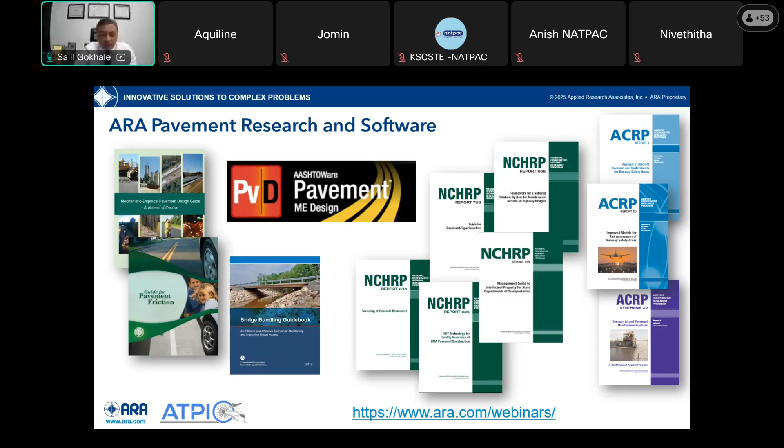So my topic today is to talk about pavement engineering. I'm a pavement engineer by trade, and I want to talk about where the state of affairs is related to pavement engineering and management here in the US and several other countries.

So what are pavements? Pavements are the largest investment in infrastructure. In any country, any agency, you have highways, expressways, city streets, roads, airports. All of these form part of the critical infrastructure, and this is the single asset that influences economic growth. If you can get people and goods from one place to another in a good amount of time without delays, you'll have good economic growth.

And pavements are complex, and they're built in a complex environment. You have all kinds of loading, weather, materials, etc.

Pavements are usually ignored by a lot of agency owners because pavements don't fail catastrophically. They're not like a bridge where suddenly one day it breaks and you have a catastrophic failure. Pavements deteriorate gradually, and even if a pavement has failed, you can usually still go over it. So most agencies still treat the problems seen on the surface, and they don't treat the underlying cause of the failures. This is not unique to any country, it's all over the world. Usually the treatment is reactive - you treat something only after failure has occurred and not proactively beforehand.

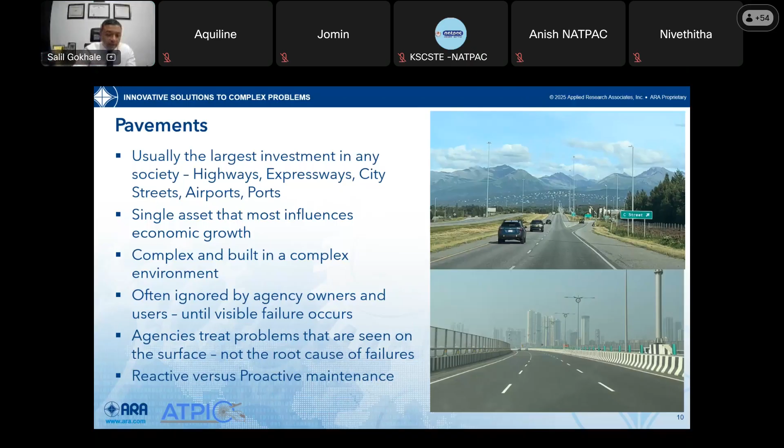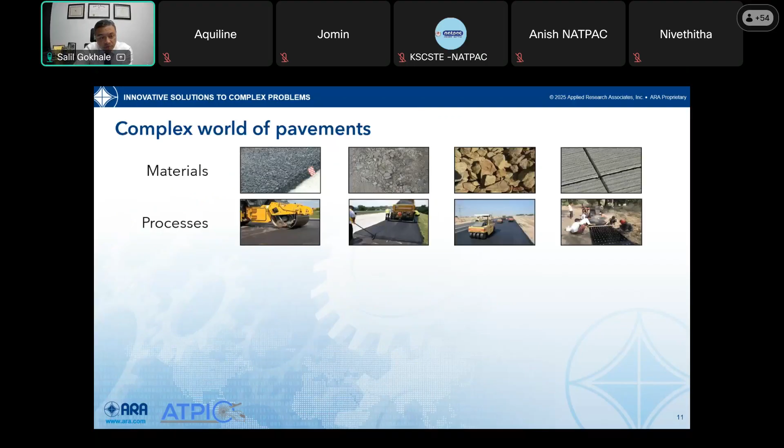So why are pavements complex? We have a lot of different materials - go from the southern tip of India to the northern tip, you have a lot of different types of materials. There are different processes in how these materials are produced, different construction techniques, different quality control measures. We have a lot of different loading scenarios - overloading, underloading, different tire types, pressures, and a lot of different environmental and weather conditions, ranging from very cold to very hot, and of course in India, we have the monsoon. So the interaction of all these different variables makes pavements a very complex phenomenon to analyze.

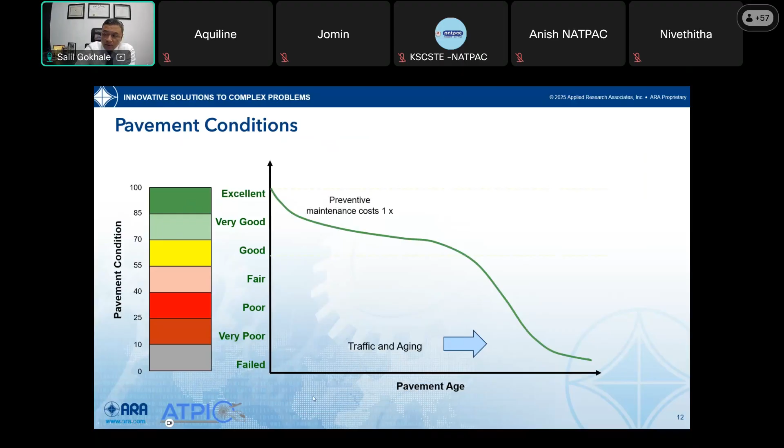Why should we be concerned? Because to treat a good pavement by doing preventive maintenance, let's say the cost is 1x. If you let the pavement deteriorate to where it goes into this good to fair, maybe poor category, now you're going to do some milling and replacing or paving, and the costs have turned 4 to 6 times that amount. And if you let the pavement fail and you have to reconstruct it, the costs are 12 to 18 times. So it's imperative that we optimize where we are treating pavement conditions, and how we optimize the limited budgets that most public works agencies have.

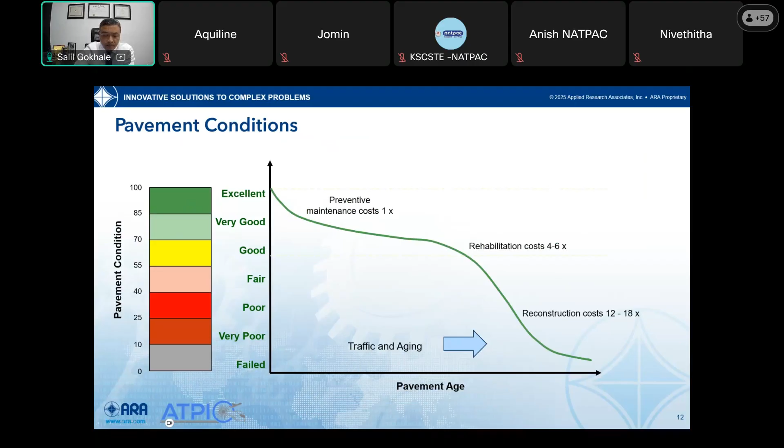When it comes to pavement performance, we define pavement performance in 2 broad categories: structural and functional. Structural is the health, the ability of the pavement to withstand loading without developing appreciable distress. And then functional is your riding quality.

How does the pavement ride? When you drive a car, or ride a bicycle or one of your 2-wheelers, are you getting a smooth ride? Is it a safe ride? Is the road having enough friction? These are functional measures. But both performance measures are interrelated, because if a road is rough, it generates a very high dynamic load, which leads to structural distress. And then the riding quality, if impacted by distresses, causes more problems.

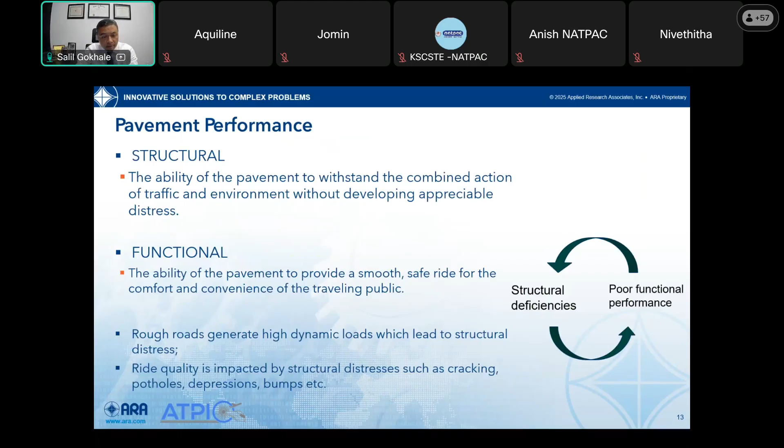So this is a cyclic phenomenon. Both these types are highly interrelated. So why would any agency collect information about pavement conditions? I mean, why do we want to know what the condition of our pavement is? Again, I'm calling pavements a broad term for any road, highway, airport, city street, etc. The generic term is pavement. So most public works agencies need to manage their network.

So let's say for the city of Cochin, maybe it has 1,000 kilometers worth of roads. The Public Works Department or the municipality of Cochin needs to know, okay, we have this network, what condition it is in, which roads to fix, when and where. And so to...

check the conditions, we need an objective methodology, and not just something subjective where you send someone out and he says, yeah, I think the road is okay, I think the road is bad, no, maybe it is good. No, we need an objective methodology to measure these conditions.

Then these conditions are used to forecast maintenance, repair, and reconstruction requirements. And most importantly, agencies need to find out what budget is needed. How much budget do we need per year to actually keep the roads in a decent condition, how to improve conditions, and what to do about catastrophic failures when you have really bad washouts or anything like that.

So here in the US, all the state departments of transportation are required to collect data on the entire network, and they're required to submit reports to Federal Highways, FHWA. Airports, of course, are a completely different animal. A lot of safety-related issues with bad pavements underneath aircraft. So airports across the world are required to submit reports. Here in the U.S., they submit reports to the Federal Aviation Administration.

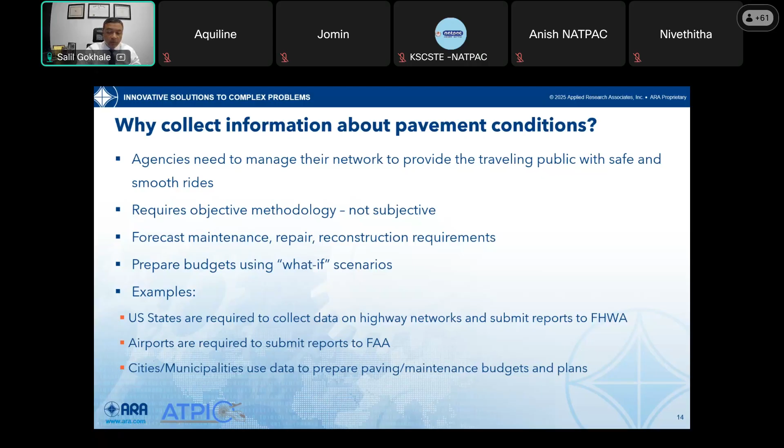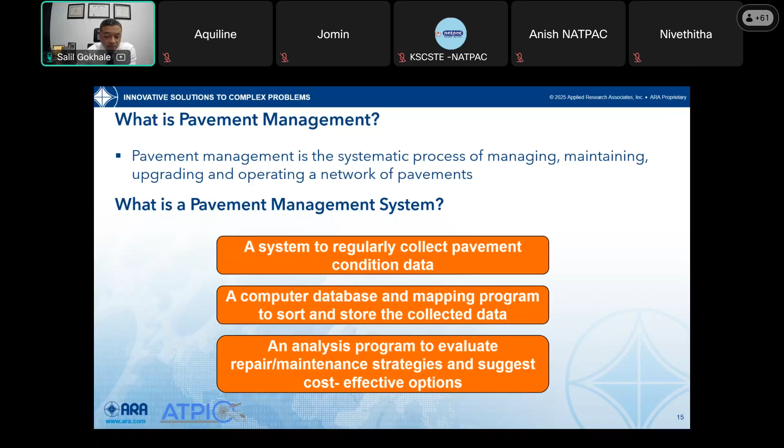So very briefly, what is pavement management? How do these agencies manage their pavements? Pavement management is the systematic process of managing, maintaining, and upgrading a network of pavements. And typically, they will use something called a pavement management system, which is a system to regularly collect pavement condition data. It's a computer database and a mapping program that stores all the records in one place. And then there are analysis tools to evaluate different strategies and suggest cost-effective options for that agency.

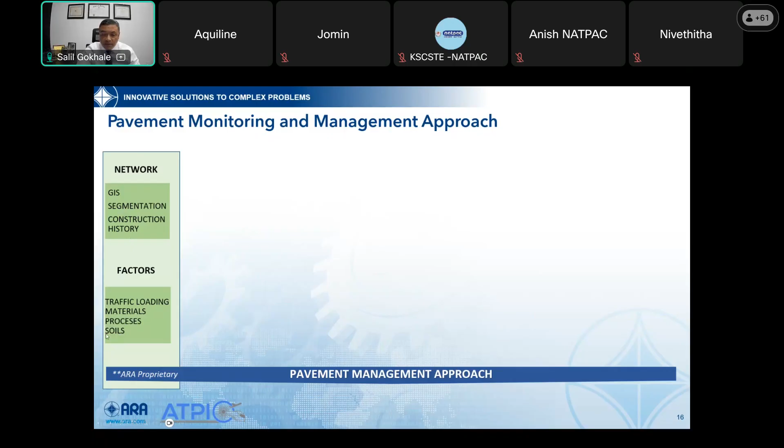So when we look at this holistically from a big picture perspective, how does this pavement management methodology work? We start by having a network of roads. We have geographic information systems, or GIS. We have a map of all the roads in an agency. We have segmentation, construction history, materials, and other factors like traffic, amount of traffic, different materials, soil conditions, etc. Then once that network is defined, we collect pavement conditions.

I'm going to talk more about how we collect structural data, surface distresses. IRI is a term you will hear quite frequently in this presentation. It's the International Roughness Index, which is a measure of how bumpy or how smooth a road is. Rutting, friction, and then it's supplemented by geotechnical testing, coring, lab testing, etc. And all of these inputs combined give us our functional and structural performance for every single roadway.

What do we do next? Then we have to do some analysis, right? We have to take all of these conditions, do some evaluation, make some determination about performance, find out the residual life. If the residual life is bad, or if it's expired, then we do some design. Most agencies are now turning to mechanistic empirical pavement design methods to find cost-benefit solutions and optimize their budgets.

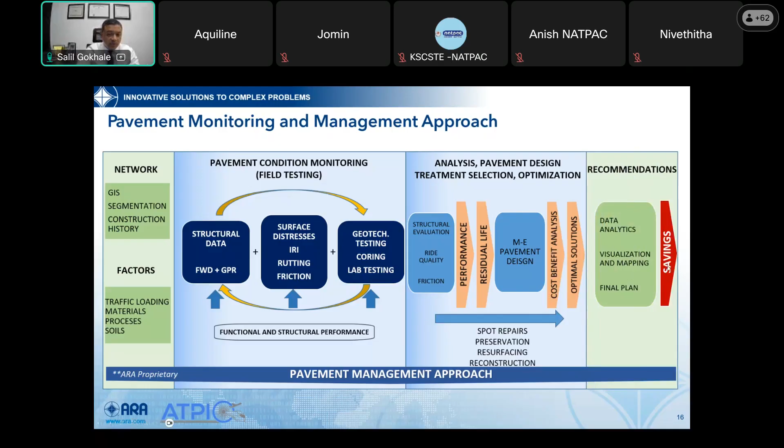And then the work plan at the end and recommendations is that most agencies will say, okay, we have this network, we have done all the collection and analysis. Here's our plan for the next 2 years, 5 years, 10 years, etc., and here's the budget requirements for it. End result is, we want to try and do savings at the end of the day. We're trying to save the taxpayer money by keeping the road network in good condition.

And as you all are researchers, where does research fit into this? Well, we are doing research on materials, or we're doing research on pavement structures, or other construction techniques. The use or the outcome of that research needs to be fed back into the cycle so that whatever good things you're finding out from research can be fed back into this loop, and you're getting the benefit from this research. So this is where accelerated pavement testing comes in, and I'll talk about that a little later on.

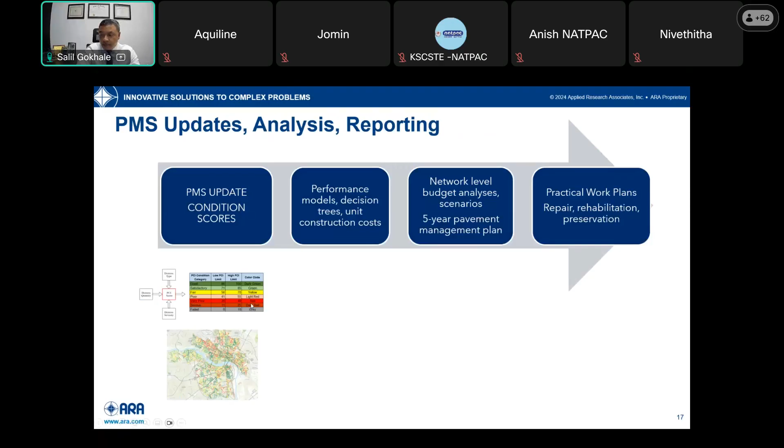Just to round up the pavement management cycle: we have a system, we update it with different condition scores, we do some modeling and pavement performance decision trees, find out what kind of treatment toolboxes we have, then we do some budgeting analysis to find out condition deterioration as well as amount of money required.

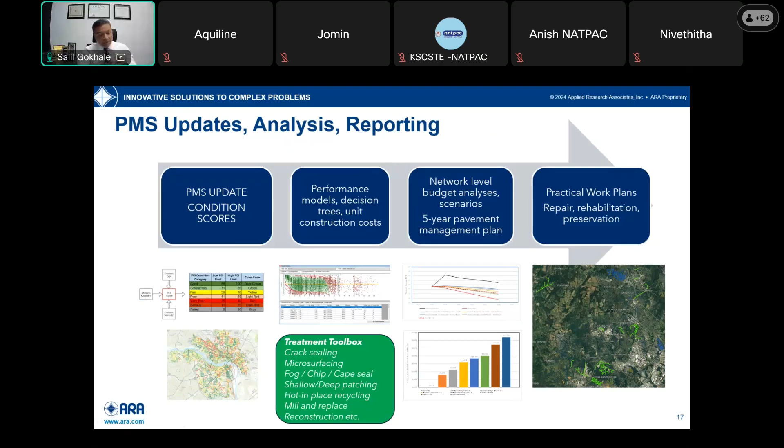And at the end of the day, we want a practical plan that can be put in place, and then you follow that plan. This is just like your asset management that you do at home, where you invest some money into a particular mutual fund or shares, and then you're following a strategy to make sure that your asset actually grows and develops.

Commercially available software: there's a bunch of commercial software out there, ranging from Paver, which is a Corps of Engineers product and the most economic. Then you have all these other online-based tools like StreetSaver, Cartegraph, Agile Assets. World Bank has the HDM4 software. I know a lot of agencies in India are using RAMS, and then others from other vendors. But the main idea is that you implement, update the conditions, analyze, maintain the system, and then repeat the process. There has to be a repetition and a cycle to do this.

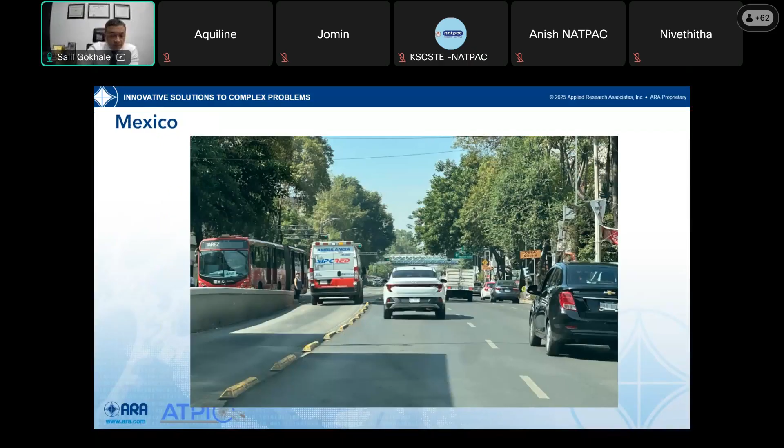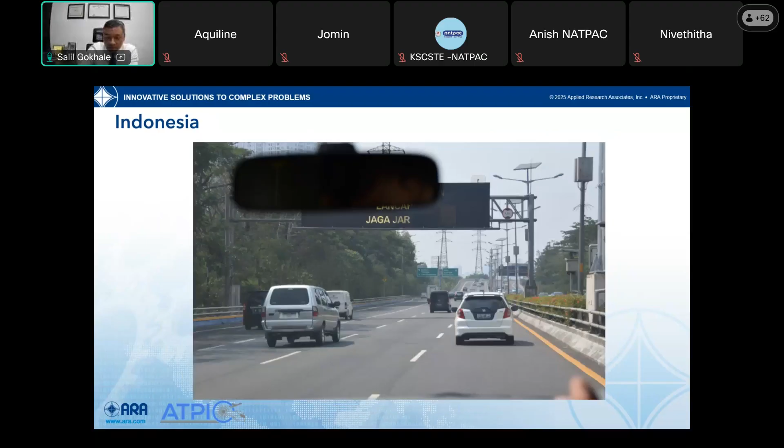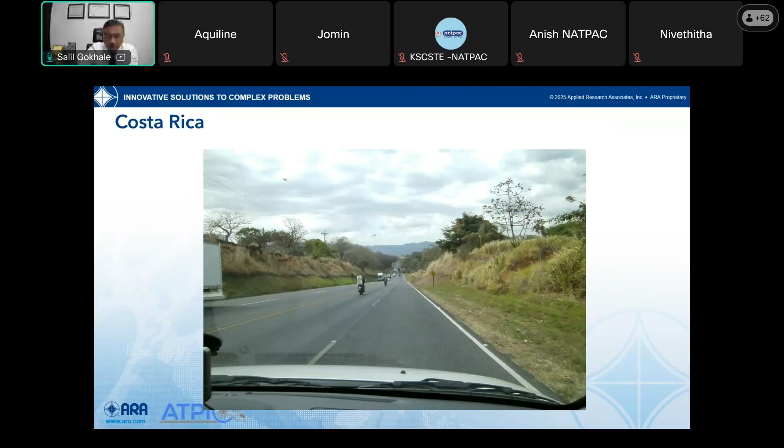Costa Rica, a central mountainous country in Central America - I've been there several times. They've done a lot of good work in pavement research. So some conditions in Costa Rica. And because it's a very hilly country, they have a lot of failures as well. They get a lot of rain, very similar to the southern parts of Kerala going up towards Periyar and the hill stations.

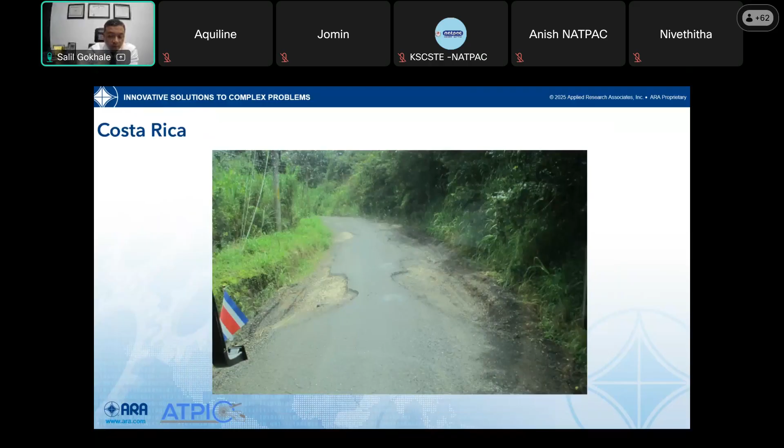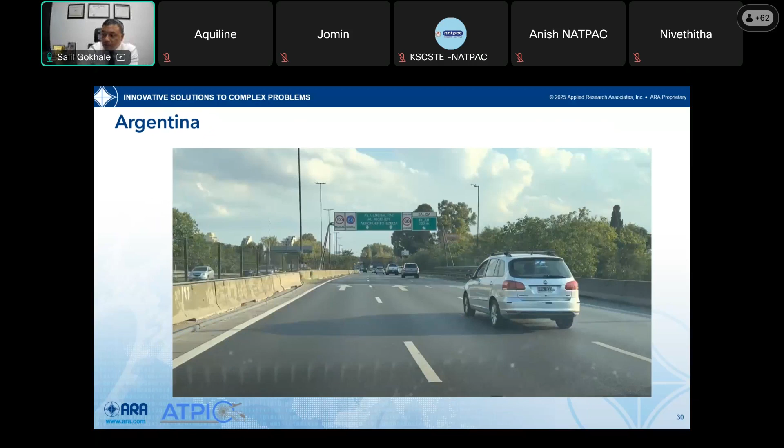Here's a rural interstate in the USA. Here's a rural city road in the USA. We also have a lot of very bad roads in the US as well - the US is not all good roads only, we have a lot of bad roads.

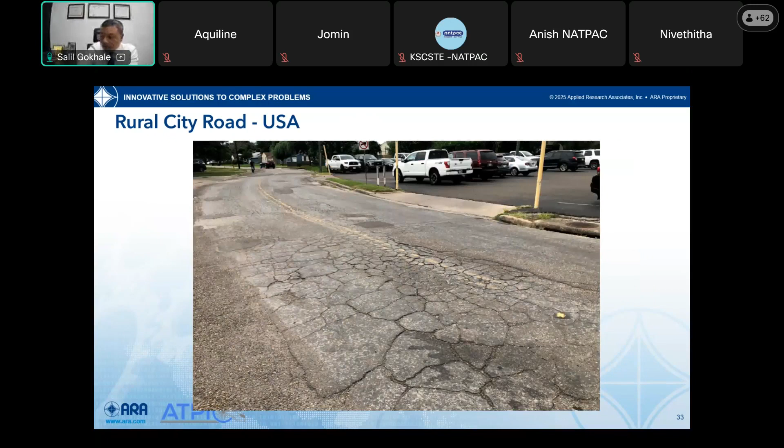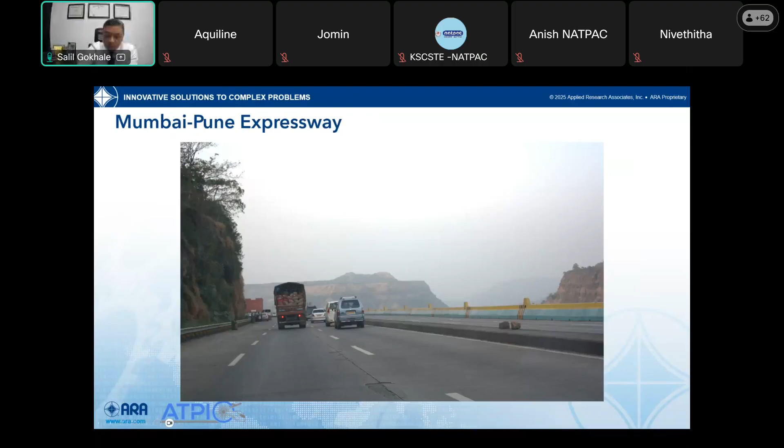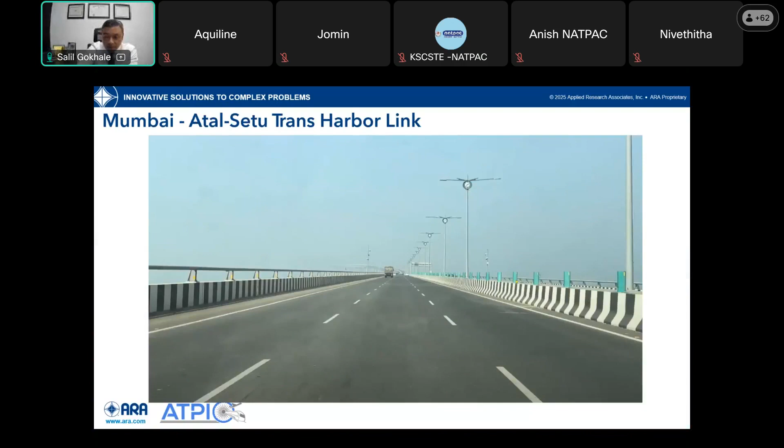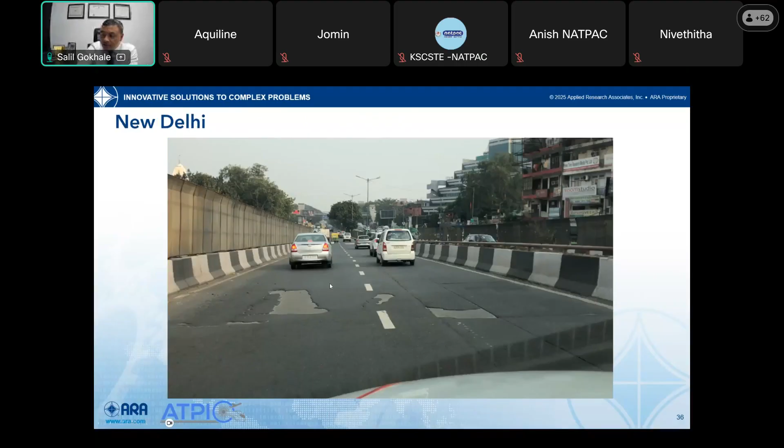You might be familiar with some of these conditions throughout India. This is from New Delhi. See this delamination coming off of this road.

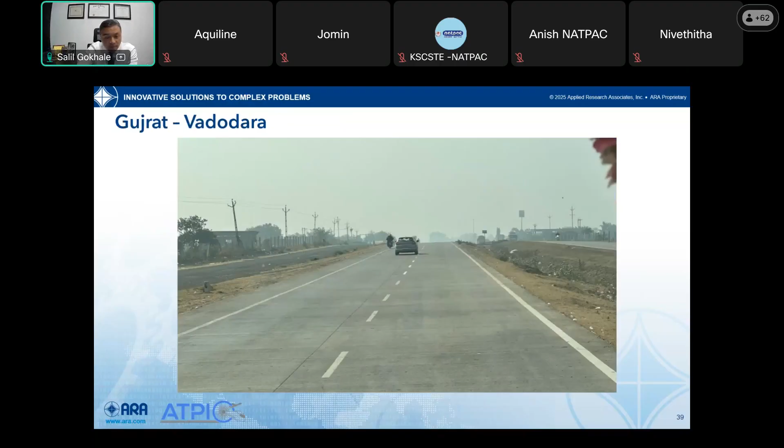Then last December, we went on a little road trip in Gujarat, and quite frankly, I was very impressed with the roads there. They've put in a lot of new concrete roads in very nice conditions. Another one in rural Gujarat.

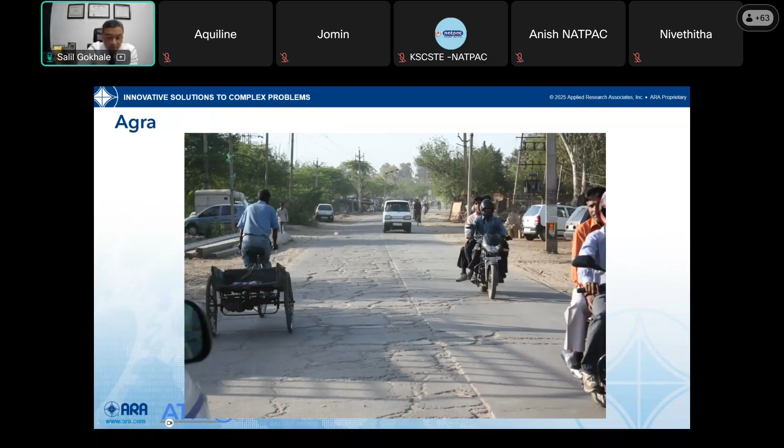I took this picture and I show it to quite a lot of people because this is a concrete road from Agra, and I have no idea whatsoever what has happened to this road, why it is in such bad shape.

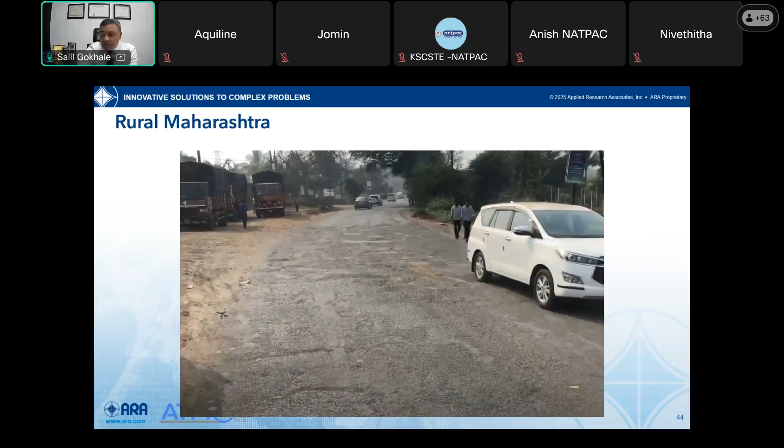So we have some combination of good roads and we have a combination of bad roads. Now we need a system to put it all together, and we need a system for evaluating the conditions.

So when we talk about pavement conditions, we have two broad categories: one is functional and one is structural. I'll talk about the functional evaluation first.

The evolution of technology over the years: in the 50s and 60s, we had the straight edge. Functional evaluation is mostly about riding quality, how the user feels when they're actually driving a vehicle. So that roughness or smoothness had to be measured.

Back in the 50s and 60s, the straight edge and profilographs were developed, and they had to be manually pushed or dragged behind a tow vehicle, and you'd get an index that would indicate how bumpy the road is. Then in the 70s, the bump integrator was developed, which accumulates the suspension movement as this trailer is dragged along.

I believe this is still in common use in India. I know CRRI also manufactures this.

Starting in the late 80s, when lasers became a little bit more affordable, laser profilers started coming into the market. And in the mid 80s, a big study was done by the World Bank to develop this index called the International Roughness Index, or IRI.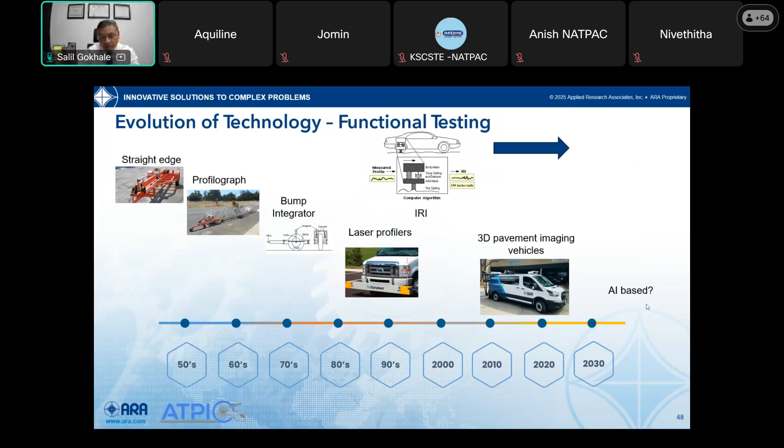In the future, is it AI based? Will we reach a point one day when we can just take satellite photographs and get conditions? Maybe. I think that's also coming.

The imaging technology itself has also undergone a lot of change within the last 10, 15 years. We've gone from film and video to area scan cameras to laser measurements, and now the most common one is this LCMS. I'll talk about this two sensor system to a single sensor system.

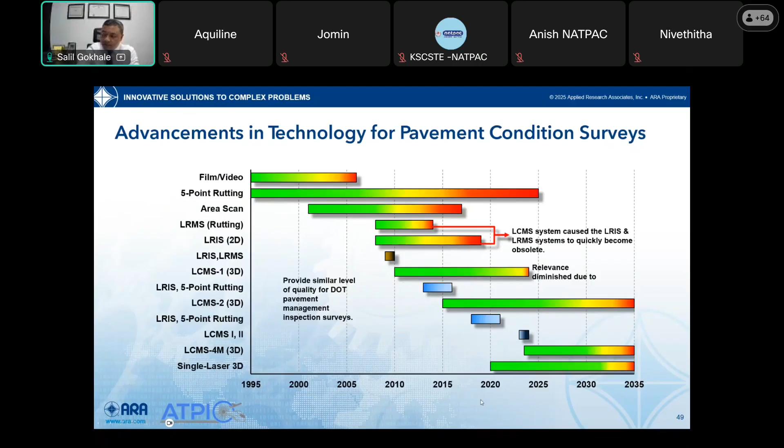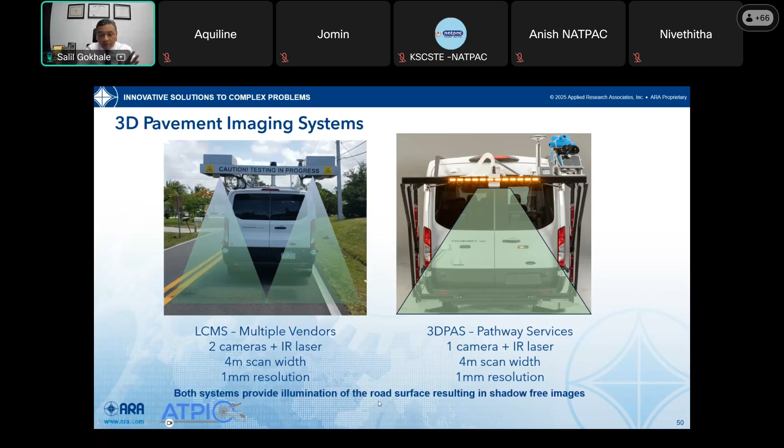The one on the right is by a company called Pathway Services, and they have a single sensor. The one on the left has 2 cameras, this one has a single camera. The resolution and scanning width is about the same, a 4-meter scan width. Both these systems are designed to produce 1 millimeter resolution of the pavement surface. You drive this van along the road and capture a continuous pavement photograph and a ranged image of the surface. Then computer algorithms pick out cracks as tiny as 1 millimeter in width. Both these systems are shadow free, so they have an illumination source that lights up the pavement.

As I said, vendors started putting in more sensors, figuring if we're driving this vehicle, let's collect more and more data. So this PathRunner system that we have has a 3D pavement imaging system. It has 4 right-of-way cameras that give you a nice panoramic view in the front, a 360 camera on top so you can do a Google Street View-style spin around, and a LiDAR sensor in the back. The profiler gets roughness, rutting, faulting. We also collect macro texture, grade, cross slope, and roadway geometry. All of these elements are captured.

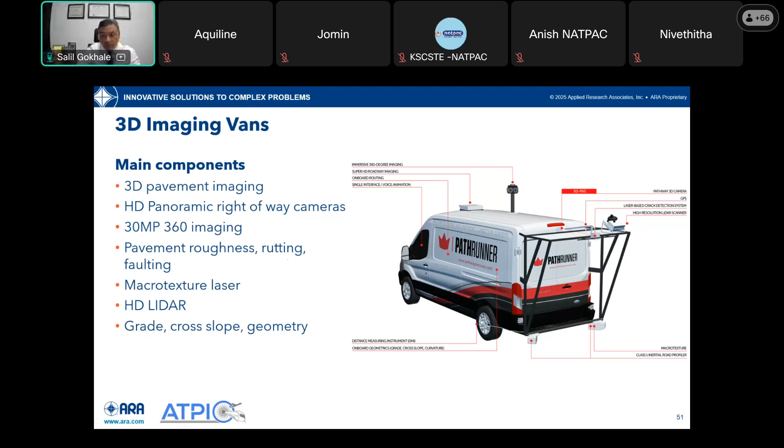As you can understand, these vans are fairly expensive, but they do collect a lot of data. Our system, without the LiDAR, collects 3 gigabytes of data for every mile of road that we scan. So it's a lot of data to manage and a lot of information to assimilate. What do we do with all these images and everything that's been captured? Well, we still need a standard way, some guidance on how to interpret these distresses and how to keep them objective.

So here are some examples for distress rating guidance. There are 2 ASTM standards: one is D6433, which is for roads, and D5340, which is used for airfield pavements. Highway agencies also use what's called Long-Term Pavement Performance, or LTPP. This provides very clear guidance on how to classify these distresses and how to make sense of it.

Once we have distresses identified, we want to score whatever segment of road we've just tested. A very common index used around the world is called PCI, or Pavement Condition Index, and it goes on a scale of 100 to 0. The score is calculated by capturing all the distresses in a particular section: the distress types, distress quantities, and severity of distress, whether low, medium, or high. All of this goes into an iterative algorithm, and the computer program calculates a score from 100 to 0.

So 100 is brand new, excellent, no distress, and 0 would be total failure. Usually roads are somewhere in between. But the PCI score essentially indicates the structural integrity and surface operational conditions of that road. Here you can see three different color coding schemes that many municipal agencies here in the US use.

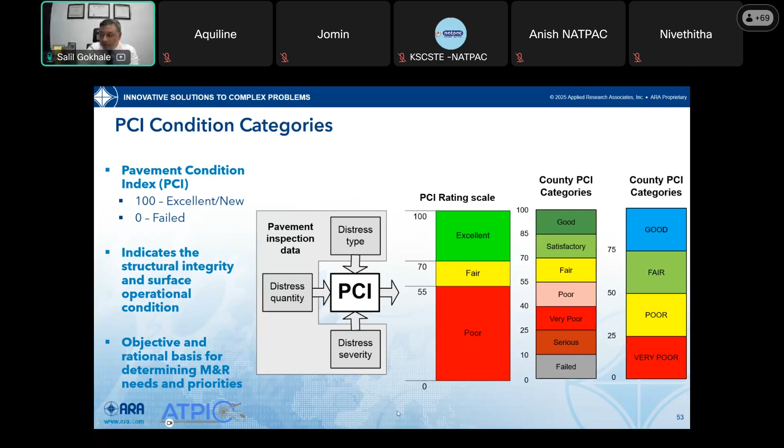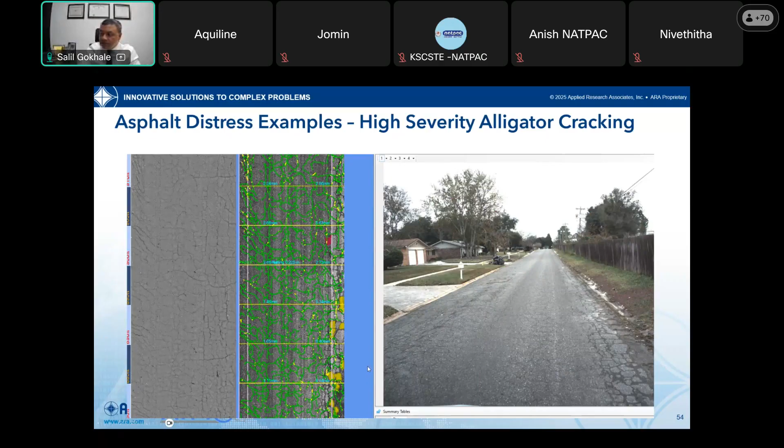This is an example of alligator cracking. For most of our projects, we take all of these distresses and map them out in great detail, especially if it's a rehabilitation or resurfacing project. We provide a lot of detail with the vans.

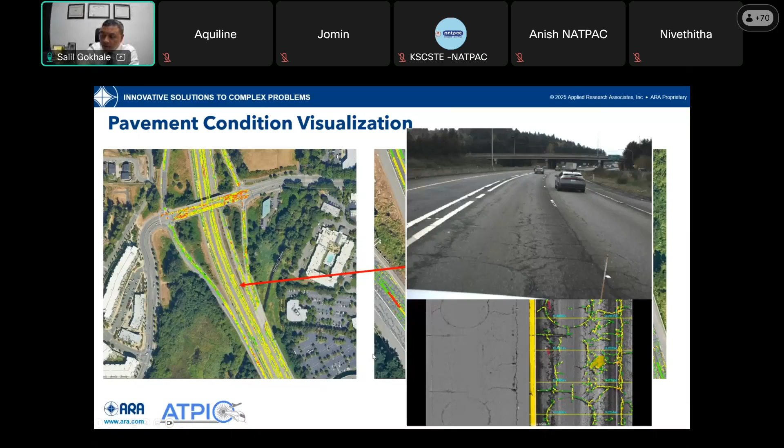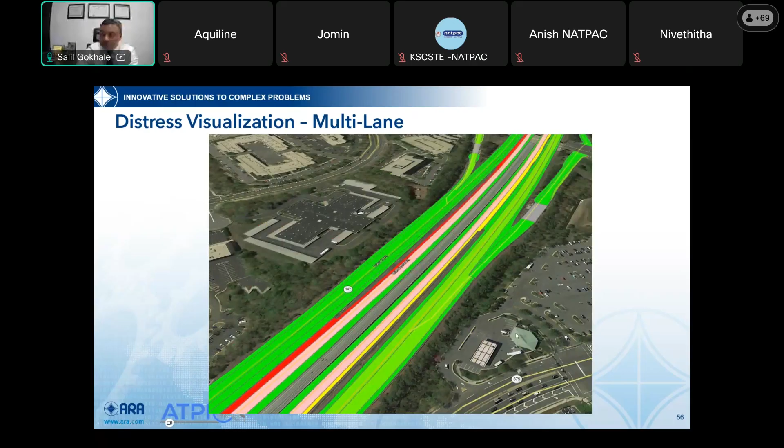For multi-lane highways, here's another example: an 8-lane highway outside of Dallas. We captured the data in all directions, marked out all the distresses, and converted them to an easier color-coded scheme so that this toll road operator agency can see which lane has more distresses and which lane is in worse condition compared to the others. Here's one more example, outside of Seattle.

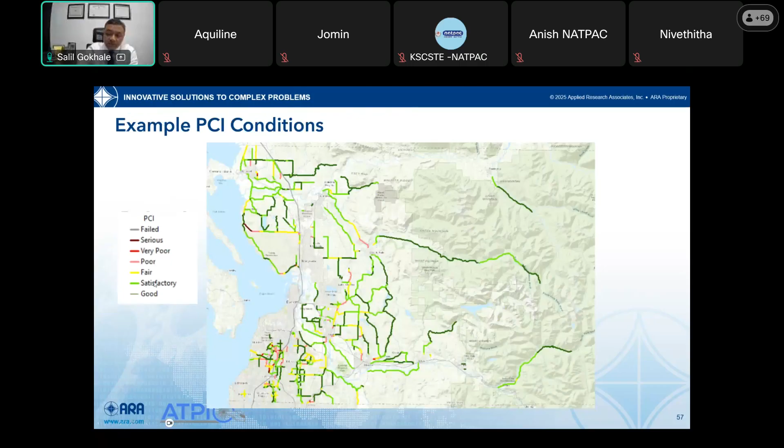This agency manages around 900 kilometers of arterial roadways, and their color-coded combinations for all these PCI scores are shown here on this map. I mentioned friction testing earlier. Why do we need friction testing? Because, of course, here in the US, we have higher speeds.

Outside of Austin, there is a road that has the highest speed limit. The posted speed limit is 85 miles an hour. So what is that? Roughly 140, 150 kilometers an hour.

When you're driving that fast, you want to make sure that if you brake your vehicle, it has enough friction characteristics with the road. So roadway agencies here take this very seriously. States maintain a large database of friction characteristics, and they use something commonly called a locked wheel friction tester, which is a pickup truck with a trailer behind.

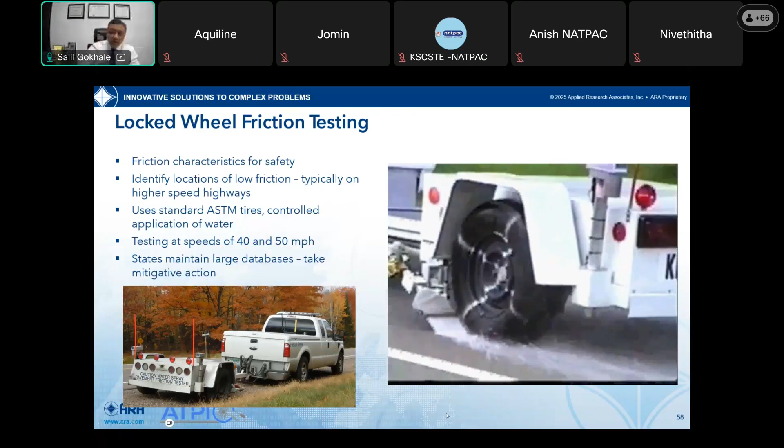The way this works is you drive at constant speed, and this machine applies a controlled film of water in front of this tire. As the vehicle drives, a brake is applied. As you can see, this tire brakes, and then horizontal and vertical loads are computed to find out the friction characteristic of that road.

There are guidelines to say, okay, if the friction number falls below a certain threshold, then there's very little texture and the potential for hydroplaning or skidding is high. So states will take corrective measures to make sure people don't skid off, especially on curves and downhill areas.

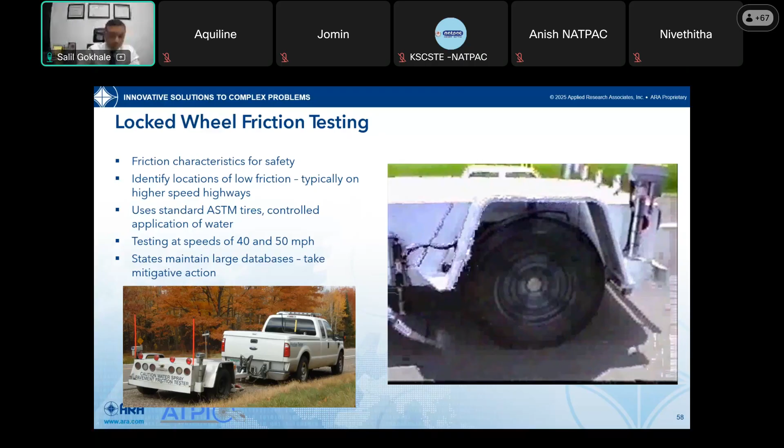Okay, so now let us talk about structural evaluation. What do we mean by structural evaluation? Again, a little bit of evolution of technology here as well. In the 40s and 50s, Mr. Benkelman developed the Benkelman beam.

This is a single sensor which measures the deflection of the pavement surface. You put it underneath the tires of a truck, and as you drive past, you measure how much the road bends or deflects. We also have the deflectograph and the vibratory deflection devices.

Pretty much no one here uses any of these three devices. Since the advent of the falling weight deflectometers, or FWDs, starting in the late 80s, almost every agency I know of has switched to FWDs. I worked with a company called Dynatest for 12 years back in the day, and this was a lot of our bread and butter for evaluation of pavement.

So I'll talk a little bit more about FWDs. But I'm also going to talk about the next generation of testing devices, which is traffic speed deflection devices. I have a whole set of slides for you on that.

So how does the FWD work and what does it do? Basically, the FWD applies an impulse load to the pavement surface to simulate a rolling truck tire or an aircraft tire. These FWDs usually come in two flavors. One is an FWD, which applies a load between 6 to 120 kilonewtons, and its heavier brother, hence the name heavy falling weight deflectometer, or HWD in short. This is meant to simulate all the way up to an A380 or a B747 tire, the amount of stress that a fully loaded tire applies to an airfield pavement surface.

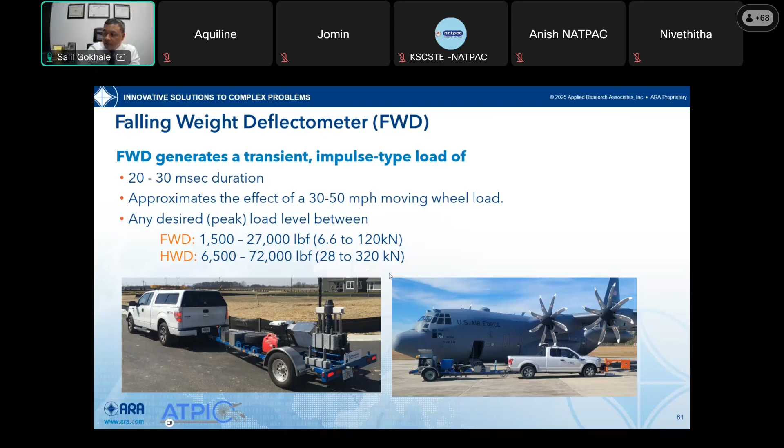Why do we want to use load deflection data? First of all, we have done the functional testing. We can see things on the surface, but we don't know what the health of that pavement is. So we need structural testing to be able to do this. Load deflection data is used for determining structural capacity and health, finding out the remaining service life. If you're doing new design or overlay design, then what thickness of overlay is required to carry the traffic.

In parts of the US, we have a lot of snow in the winter, and when the snow melts, the ground turns pretty mushy. Very similar conditions to our monsoon. What happens in the monsoon? You get a lot of saturation, subgrade strengths weaken big time. But in the US and other countries, they impose seasonal load restrictions. So if you have big trucks, they can only carry a certain amount of load, especially if the pavement has weakened in the seasonal thaw cycle.

This picture here on the right, we did a project for SpaceX because they wanted to find out whether this road outside their facility was strong enough to make sure that this rocket could be moved to the launching pad without any issues.

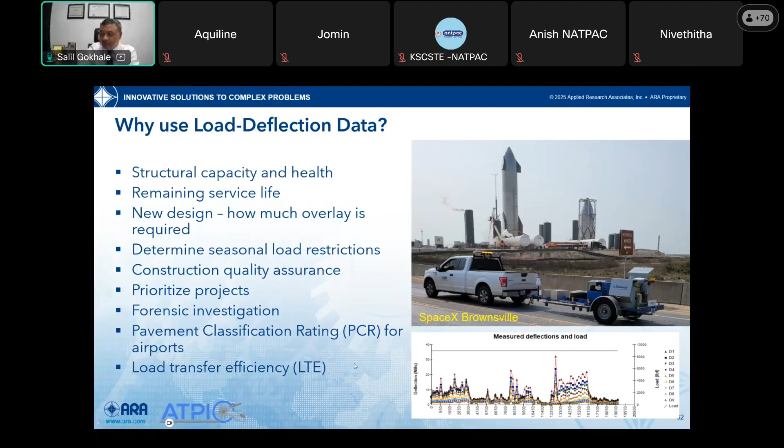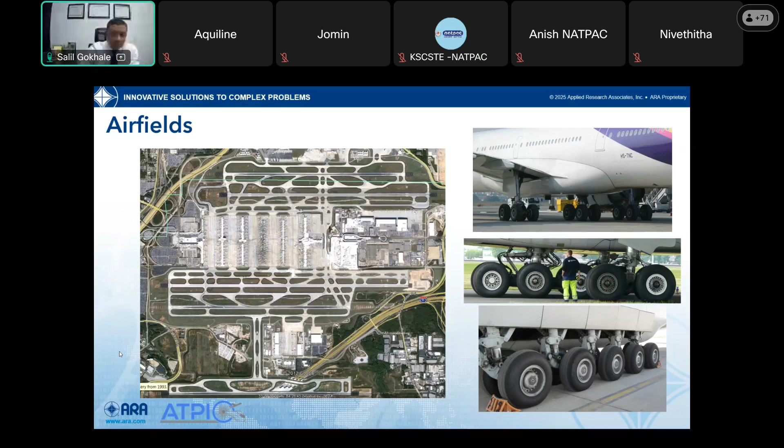It's got 5 main runways, and pretty much this traffic coming in and out, all shapes and sizes of really heavy aircraft using these. So why do airports want to maintain their pavements in good condition?

Well, they want to make sure that all the pavements, so the runways, taxiways, aprons, ramps, that they are strong enough to carry whatever aircraft is coming in, and that any movement of that aircraft on those runways or taxiways will not produce damage. If there is damage on the pavement surface, if there's a breakage or if there's loose material caused by pavement distresses, those can get sucked into the engines. That's called FOD, foreign object debris. You definitely don't want any pavement-related FOD to get sucked into aircraft engines, because that would be catastrophic.

So airports are required to test their pavement surfaces and report this to the governing organization. They're required to say, okay, if an airline tomorrow says that we're going to start bringing in 777s, or we're going to start bringing in A350s, that the pavement is strong enough to handle that.

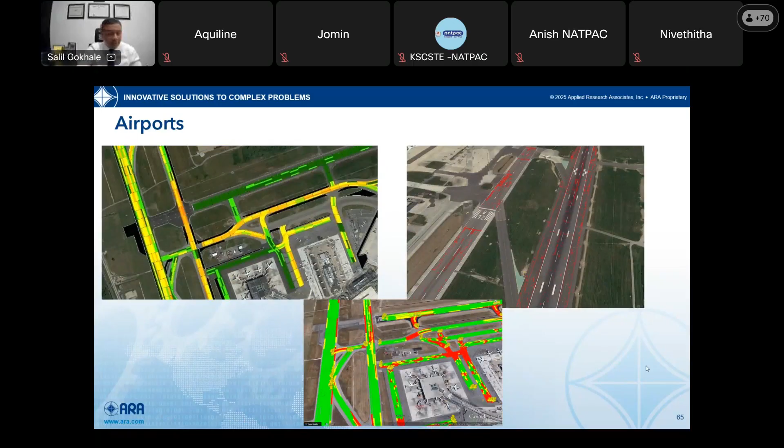Along with the structural testing, we supplement that with ground penetrating radar. What is GPR? GPR is a series of antennas inside a case, sending radio waves into the pavement, and we use this for subsurface investigation. So we have the structural response of the pavement from FWDs, but we also want to find out what the layer structure is. So we use GPR.

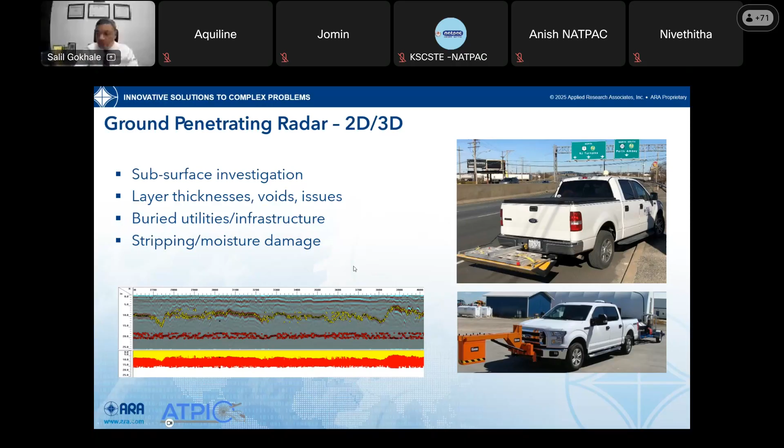We want to find out information about voids, or if there's any stripping or pavement defects underneath the pavement surface. We also use it for identifying utilities, or if there's something right underneath a pavement structure. Here's an example of utility mapping that we did. We scanned this whole area and found all these pipes and utilities underneath the structure.

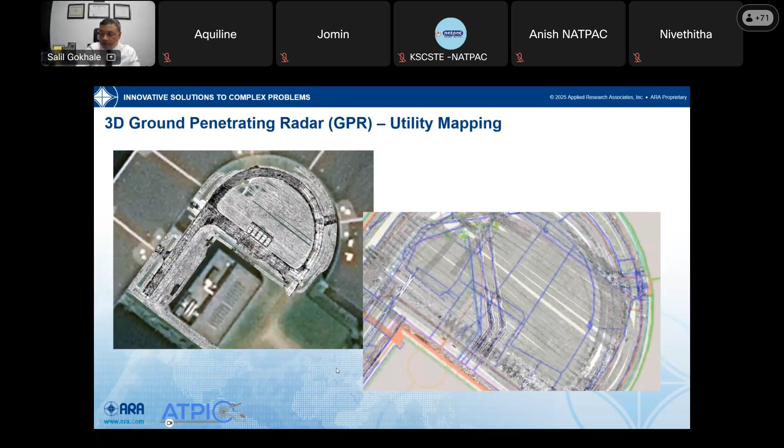So just a quick sip of water.

All right. So what is the next generation of pavement testing, and where is the industry heading around the world? We've talked about the different vans. We've talked about falling weight deflectometers. We've talked about structural and functional testing.

The next generation is something called traffic speed deflection devices, or TSDDs. Why did a lot of agencies want this? They're saying that falling weight deflectometer testing is good, but one of the main drawbacks of FWD testing is that it's discrete. You have to drive the pickup truck and the FWD trailer to a spot. You have to stop, take the measurements, even if it only takes 15-20 seconds. But you still have to stop, which means traffic behind you has to stop.

Here in the US or European countries, we have to have proper traffic control. Traffic has to be diverted. We don't want to cause any accidents. So agencies were saying, well, we don't want discrete points, we want the full picture, a continuous measurement of pavement health. How do we do it? About 20 years ago, companies started developing TSDs. The most common, most prevalent one right now in the world is this device by a company called Greenwood.

They're the ones developing this. The company I worked with, we also developed a machine called the Raptor. This has now since been sold to Ramboll. And then the newest one on the market is a device called the Measure Road.

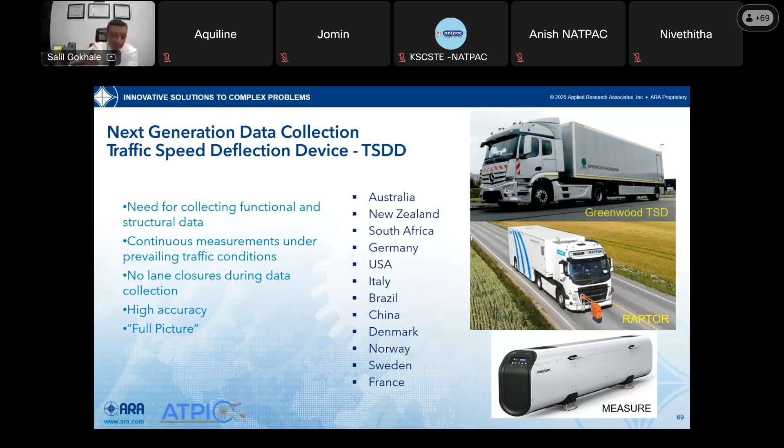It's essentially the same technique, same measurement principle, but by a different manufacturer. These types of TSDs have now been in service for quite a long time. Australia, New Zealand, South Africa have been using this for the better part of 15 years. A lot of testing has been done in the US as well, and now it's heading over to other countries. The biggest advantage is that this is a full-size truck applying a full-size truck load to the pavement, measuring the structural response as it drives.

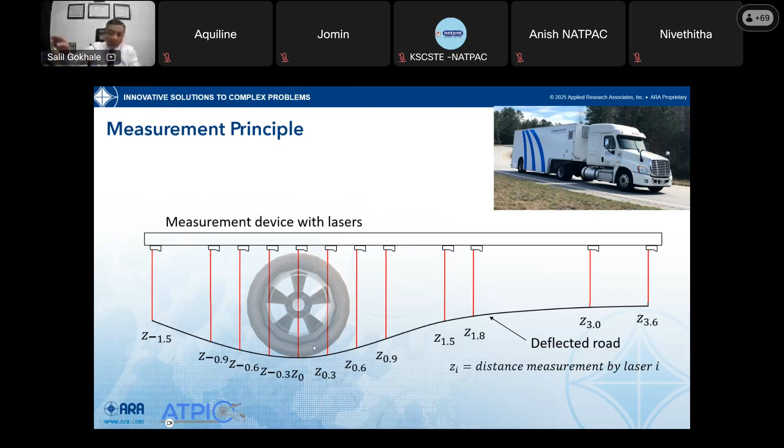So how does it work? This is from the Raptor device. Let's assume this is an undeflected road. You have the truck tire applying stress to the pavement surface, so the pavement surface deforms, deflects, or bends, whichever you want to call it. What we're trying to measure is this deflection basin produced by the moving load, whether with standard lasers or Doppler lasers - different vendors have different techniques, but this is the measurement principle. As this entire system drives along the road, the electronics inside the truck capture the deflection basin. If we can get a deflection basin in the road, then we can find out its structural performance.

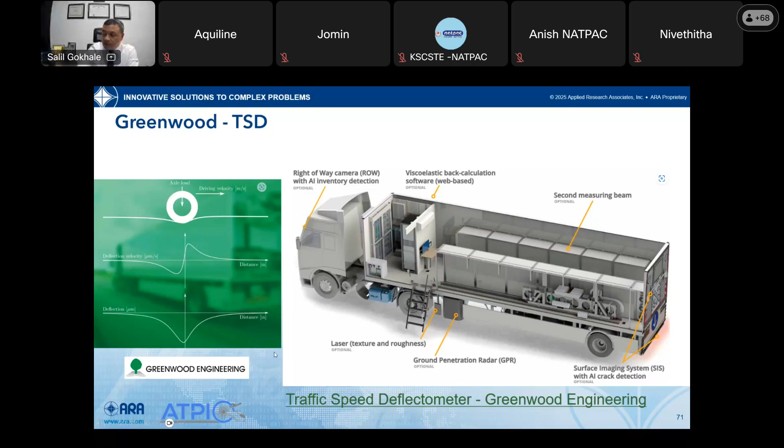Here's a schematic from the Greenwood device. They've added right-of-way cameras, they have some solutions. This is a full-size semi-trailer, as we call it here in the US. There's a measurement beam inside, and a whole bunch of Doppler lasers. These lasers measure the deformation. In my presentation there's a link - please feel free to check out Greenwood Engineering when you get a chance.

Then I reached out to my friends at ARRB Systems, Australian Road Research Board - they're a private company now. What they've done is taken the Greenwood TSD, still a Greenwood TSD, but greatly modified it, adding in their own software and analysis algorithms to produce what they're calling the iPave system. My understanding is ARRB Systems is going to bring one of these trucks to India very soon. Thanks to ARRB, I'm showing some of their slides in this presentation as well.

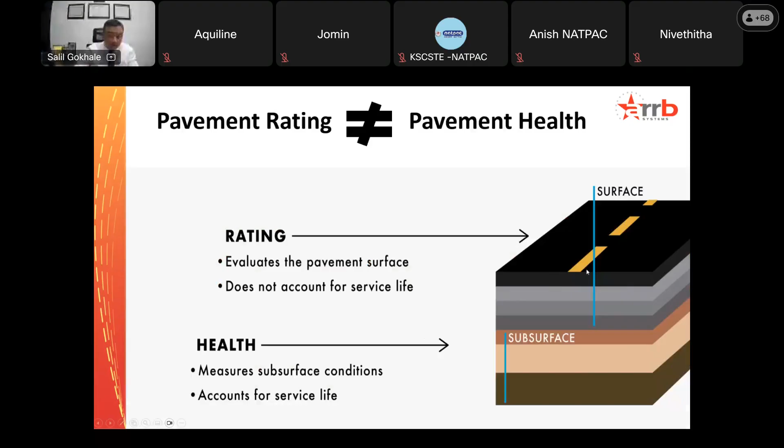Again, we talked about functional performance, which is what we see on the surface. What this system was saying is that we cannot rely only on the pavement surface to capture conditions - we need the pavement health, we need to measure the subsurface conditions as well.

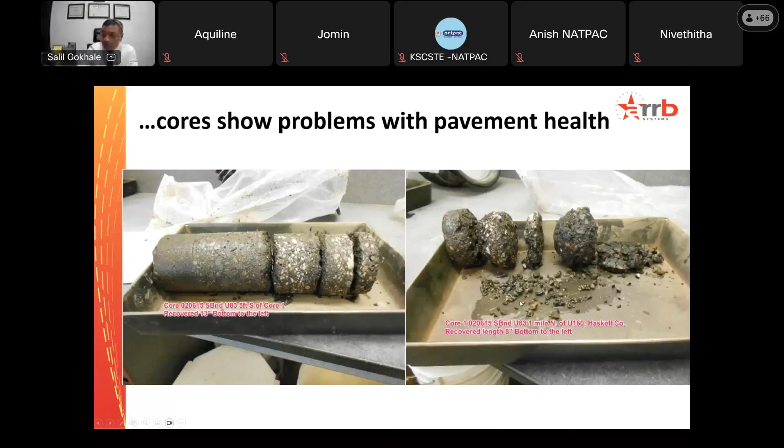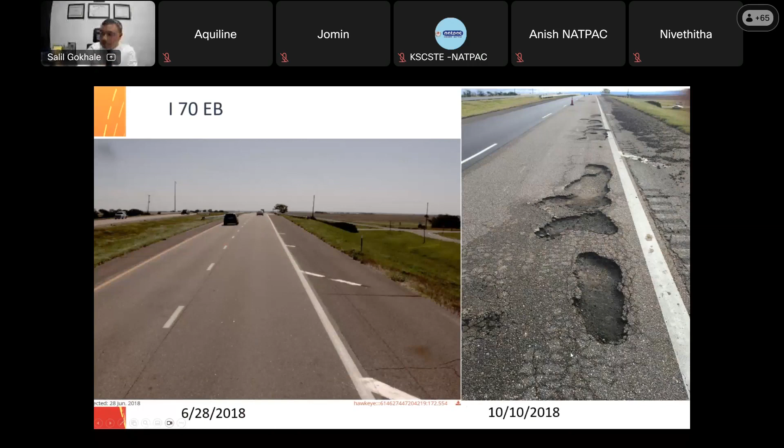This was the picture on the left-hand side, taken in June of 2018. Then four months later, when they went back, of course weather conditions had changed, but look at how much damage has been caused in this road because of the subsurface conditions in the asphalt material. The TSD was able to pick that up.

So what ARRB has done, basically, is consider all the different measurement methods and say: if we're measuring deflections, why don't we add other sensors to capture the one big picture of the road in one system? So they added a digital imaging system, a profiler, texture laser, and of course GPS - everyone has nice GPS now. They added an inertial measurement system, 3D GPR, and all of these systems are now integrated inside ARRB's Intelligent Pavement Assessment Vehicle, or IPAVE as they call it. This system basically collects data.

You drive this truck, it's literally driving a truck down the highway, and it is collecting tons and tons of data. So ARRB collects this data, and then companies like ours, ARA, we are specialists in analyzing the deflections and making sense out of it.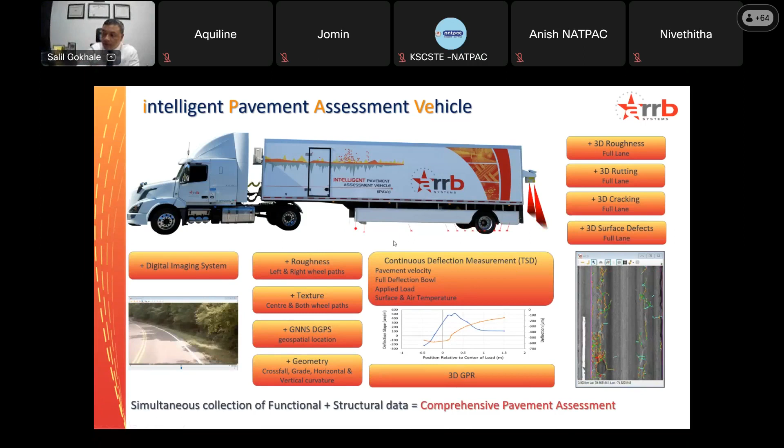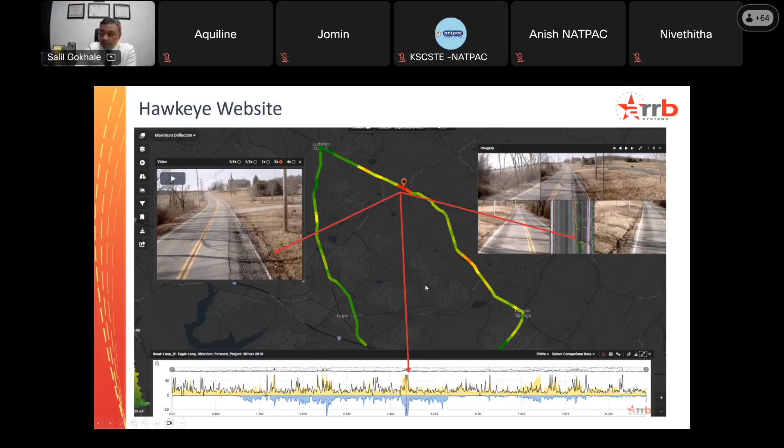So go to the next slide. What ARRB has also done is they've produced a really cool website that shows all of the data. So you see here, this is a road that they've tested. The red is showing areas of high deflection. You can see this is a very badly deteriorated patch on this road, supplemented by high deflections, high alligator cracking, and all the ancillary data as well. This is a very nice website - you hit play, and it basically shows all the information. A lot of good information is being captured by the ARRB system.

They have two case studies that they asked me to possibly demonstrate. Here's a road that was captured - you can see surface cracking. So they're like, well, the surface cracking, but does that mean that only the top layer is bad, or is the structure itself bad as well? But when they looked at the deflection data and the pavement information underneath, they see these spikes, and they're like, yeah, this confirms that the structural distresses seen on top confirm a weakening of the structure underneath.

And in the second case, you have a pavement structure that does not show any visible cracking, but when they look at the deflection data underneath and the structural response to that pavement, it's indicative of structural problems. So the question is, is this agency going to proactively treat this road, or are they going to wait till big potholes appear and someone gets into a bad accident?

Okay, so wrapping up, I know we're coming up on time. Talking about research, we've talked about pavement conditions, managing them, and utilizing this data to make a plan and manage a network. How do we use research now to feed back into this loop and put our research to good use?

So accelerated pavement testing, or APT, is the rapid evaluation of pavement and material performance under real life conditions. APT essentially means we are accelerating the loading applied to a pavement under controlled conditions. So we apply 20 years of truck traffic in as little as 3 months, and then we control the materials construction in essentially a lab environment. And then the results are used for validation and calibration of design and construction.

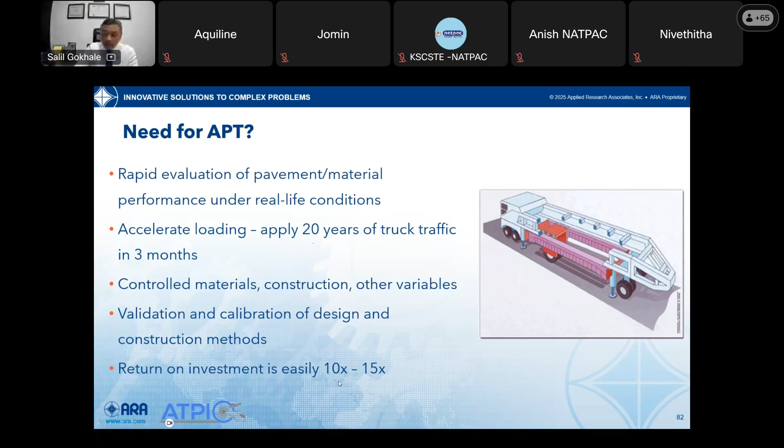I've worked in this area for a good 15 years, and the research has shown a return on investment - this is an expensive program to run, not a cheap program. Similar to what ARRB had, their truck is big and also very expensive. Even for us here in the US, it's very expensive to collect one day's worth of data. APT programs are the same - you have to put in the amount of research and the amount of funds to get feedback. But the ROI can be easily between 10 to 15 times. So that's something to think about.

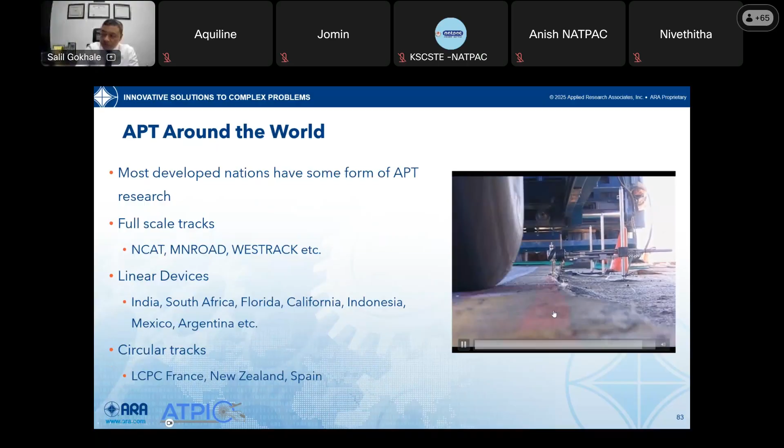Most developed nations have some form of APT research in place. There are many full-scale tracks around the world that are actual simulation of real life, and barring that, there are linear devices - there's one in India, I'll show you some pictures, South Africa, Florida, California, etc. Then there are circular tracks in France, New Zealand, Spain, etc. What these devices do is essentially apply - this is one real truck tire, and this truck tire is loaded or overloaded vertically, so we're applying a lot of stress on the pavement. And then you apply this load going back and forth in the machine to determine how much deterioration is happening to the pavement structure.

So just some quick examples - this is the NCAT, National Center for Asphalt Technology test track in Alabama. This is almost a 2.5 kilometer loop, and this has been in operation for almost 25 years now. They use these big tridem axle trucks with heavy loads, and these guys just drive around and around probably for 14 hours a day. They apply loading to the pavement, and each pavement section is about 200 feet in length. The NCAT agency analyzes and reports all of the pavement performance measures on that.

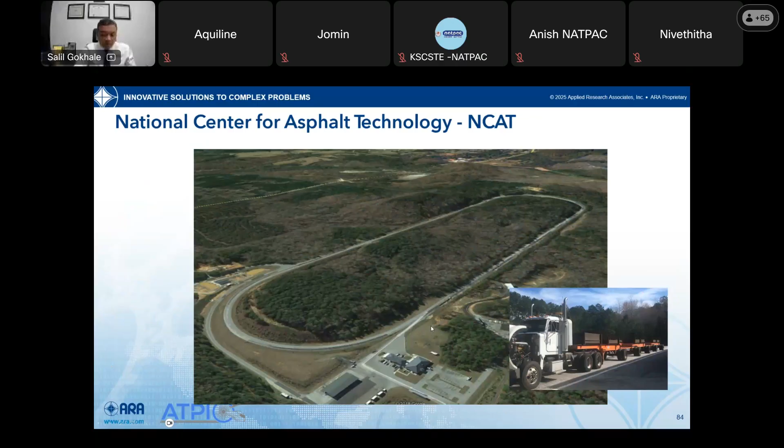We also manufacture some smaller, more mobile versions. This one is in Louisiana. We have one in Canada that is mounted inside a truck. Federal Highways has two of our machines, and the one below is in Illinois.

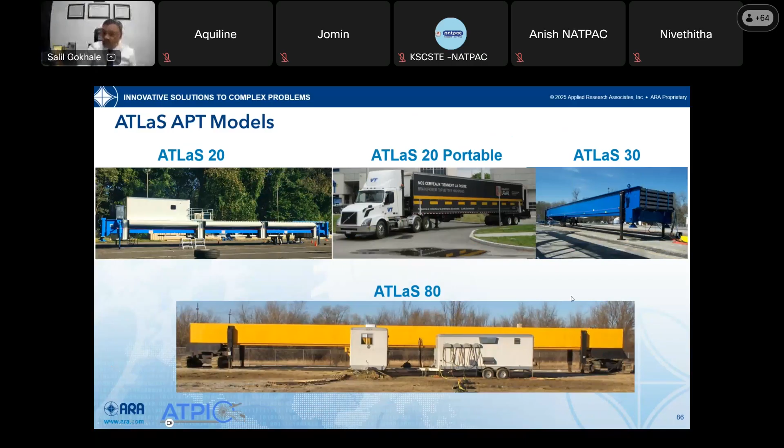The other company I work for, Dynatest, manufactures a machine called the Heavy Vehicle Simulator. I've been personally involved in many of these implementations, deliveries, and setup of these programs in China, Saudi Arabia, Costa Rica, California, Indonesia, and Mexico. This is called the Heavy Vehicle Simulator.

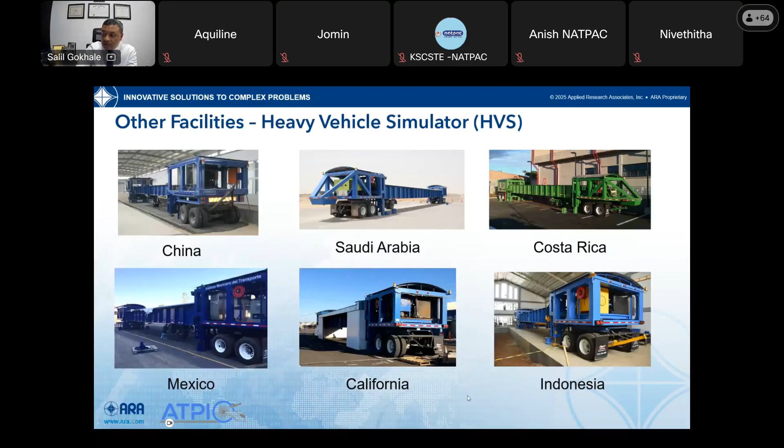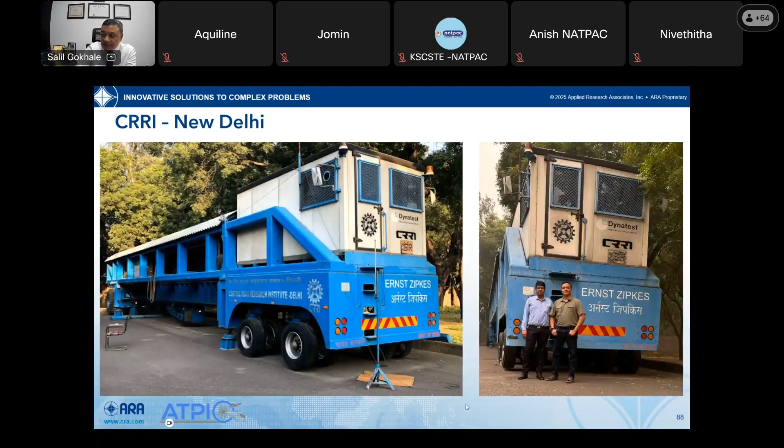I'm also proud to be part of the team that delivered this machine to CRRI in New Delhi. It has been operational since 2010. The name of this machine is Ernst Zipkes, after the first Director General of the CRRI, so they named the machine after Mr. Zipkes.

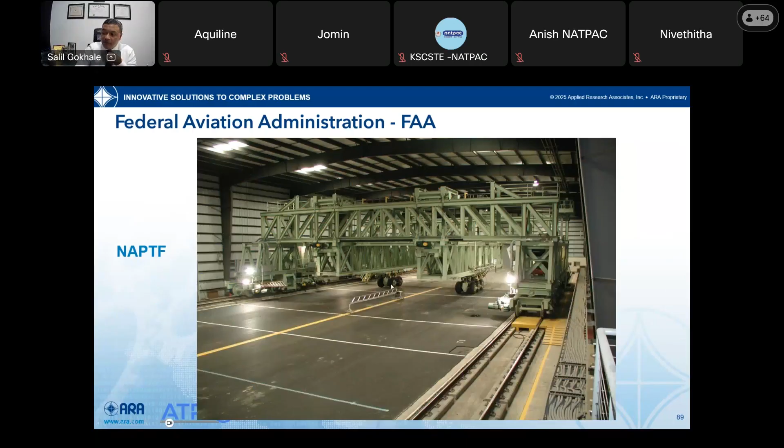The Federal Aviation Administration has a huge facility in New Jersey called the NAPTF. This one is designed to test full aircraft gears and their effects on pavement structures. Whatever the FAA research team does, and the advisory circulars they produce, all come from pavement testing using this giant machine. They have a second HVS that they purchased several years ago, and they're constantly doing pavement research for airfield pavement using these two machines.

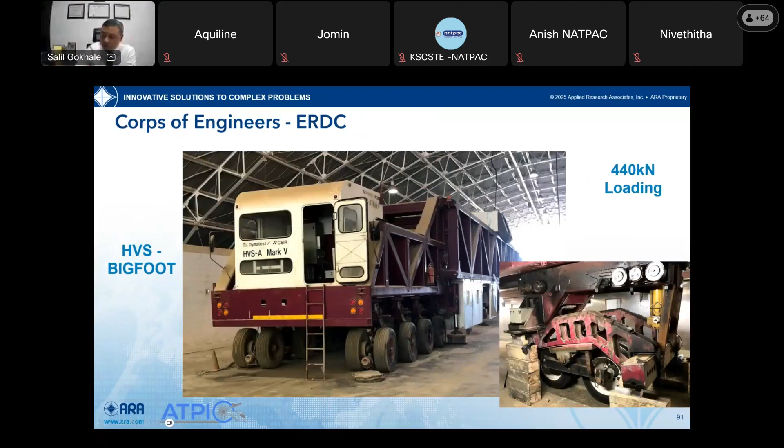The Army Corps of Engineers in Vicksburg, Mississippi has another of these big machines. This one can apply 440 kilonewton loading, with a very big dual tandem bogie that applies pressure and stress to pavement structures. They bought another one five years ago called the Titan, and currently they have retrofitted it with a rail axle bogie to test railway pavement structures.

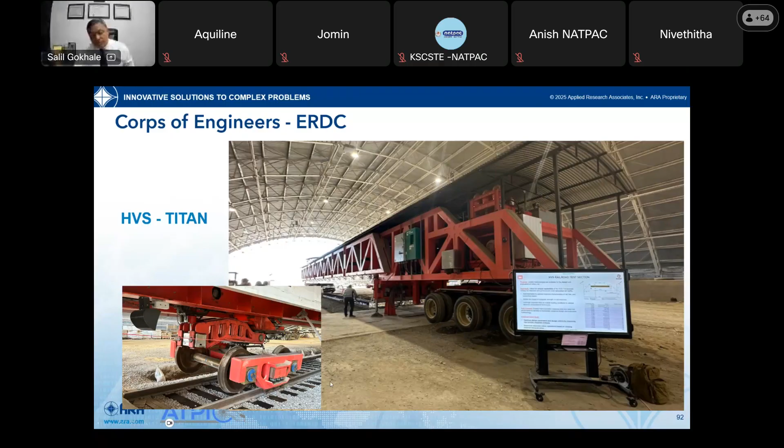So some very cool research is being done by all these agencies. And how do they implement it? What do they take out of this research? How do they put it into a feedback loop for the state? If we look at the South Africans, this is where the HVS technology came from.

The South Africans have been using HVS practically in all aspects of pavement engineering since they started, so they have over 40 years of experience. Their entire design manual, their entire design methodology, asphalt mix design, and concrete mix design are all results of the research that CSIR South Africa has done over the years, and basically they have implemented it into practice for their local agencies.

Similarly, California has 35 years now of APT experience. They've developed numerous publications. CalME, a mechanistic-empirical pavement design software, is a product of their APT program.

I mentioned FAA and the Corps of Engineers. When they have heavy aircraft that they want to land in not-so-suitable places, they study the effect on pavement structures through a lot of research. All the FAA advisory circulars have also been a result of their APT programs.

A great success story is the little country of Costa Rica. They purchased an APT device 12 years ago, and in that time they've developed their own mechanistic empirical pavement design guide. People there have published more than 200 journal papers. They've been fantastic — they decided long ago that they want to improve conditions in their country and need solid research to back this up. So they've been very successful in running their APT program.

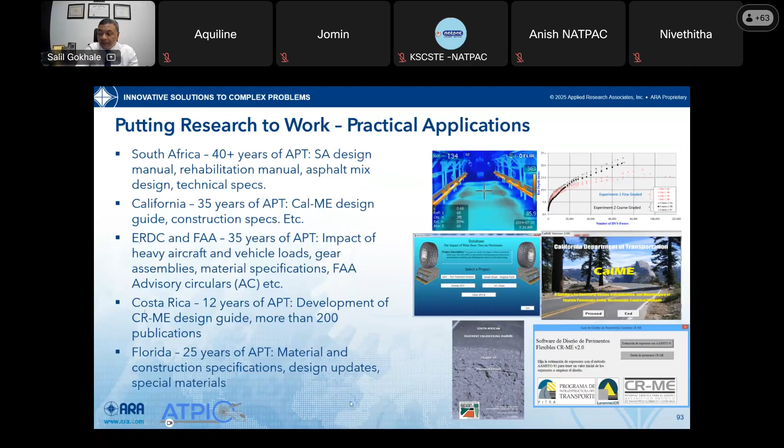So to wrap things up, objective pavement condition assessment is required. Of course, we don't want anything subjective. We want an objective method that encompasses functional and structural conditions. We want to implement pavement management systems that keep everything in place and provide the analytical tools to provide recommendations.

And yes, to all your political leaders, please invest more in R&D. R&D is critical. We want to put the output from R&D to good use. And last but not least, our ultimate objective is to keep the traveling public safe. We cannot control all accidents, of course, but at least they should not happen because of bad infrastructure.